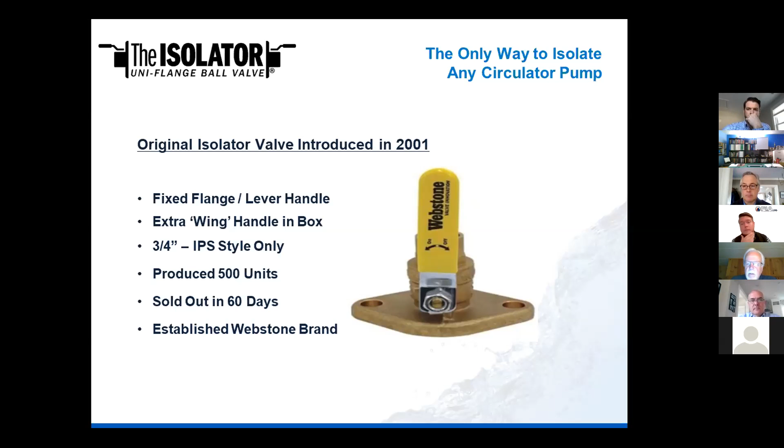So take a look at the offering now. Really the broadest offering of isolation valves in the industry. Rotating flange, isolators with drains, double flange checks, round flanges, flange styles, which we'll review. But from 1/2 inch to 2 inch and with 7 connection styles, we've really got the broadest offering in the industry. If you're wondering about the end connections, that's green and blue.

We partnered with Aquatherm about 8 years ago now and produced an end connection for the polypropylene piping. And we produced a generic version as well, which is the blue ends. And this was a challenge for our engineering group. We had to figure a way to mold a plastic resin end onto a full forged brass ball valve. And we did it for the isolator and a few others. Next slide, Chris.

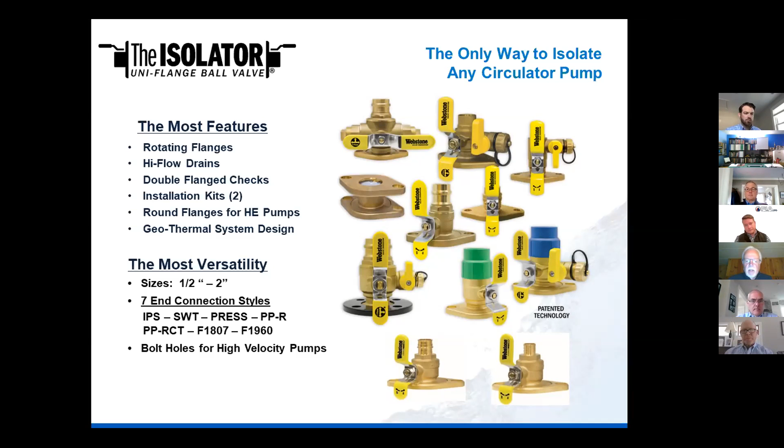Just did a little research on the market in New England as far as the press end connection goes. And this has been pretty steady for the last year or so. 45% of the isolators sold are press, and the combined IPS and sweat make up the balance of 55%. So we definitely have a press market. We've known that for some time. And it's indicative of some of the models we've come out with, which we'll review in a little bit. Next slide.

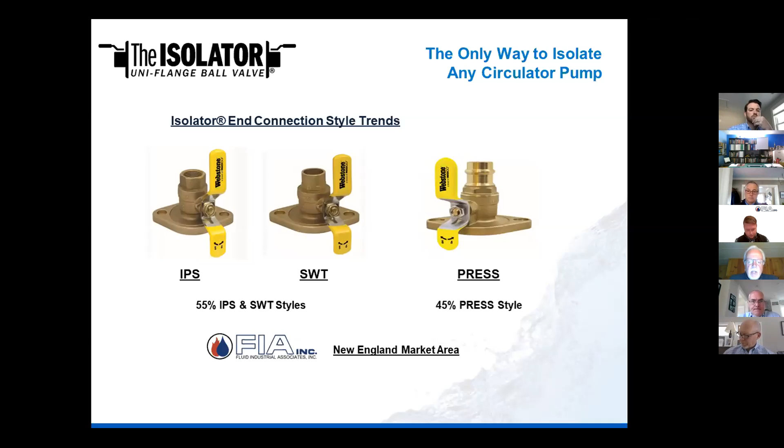Here's the story, and this is similar for a lot of the offerings from Webstone, where we've got time savings. The old way to do it is a time-consuming component assembly, and it has just made sense to a lot of the tradesmen in the Northeast and in New England to get the valve already produced. If you can take a look at where this purge valve is here on the fixed flange isolator. Next slide, Chris.

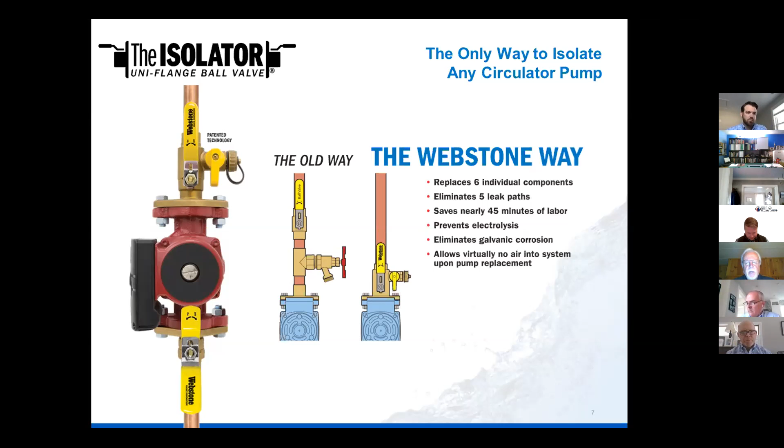When we came out with rotating flange, you'll see the purge drain here is right off of the main ball valve. And this created an opportunity to design a ball valve that could do something that nobody else in the industry has. So this is a unique product to Webstone. We call it the multifunction drain. And if you take a look at the illustrations, the one on the far left shows the application where the flow goes right through.

You turn the valve to the left, and you've isolated the top of the valve and allowed the flow from the bottom, always with an outlet to the purge. And if you turn the valve to the right, you've done just the opposite. You've isolated it from below, and your flow is from the top and always to the purge drain. So this is the only isolator in the industry where you can purge from both sides of the pump.

Some contractors feel this is a great advantage, having kind of a central purging location, but it can certainly be helpful if you need to purge from either side of the pump. Next slide.

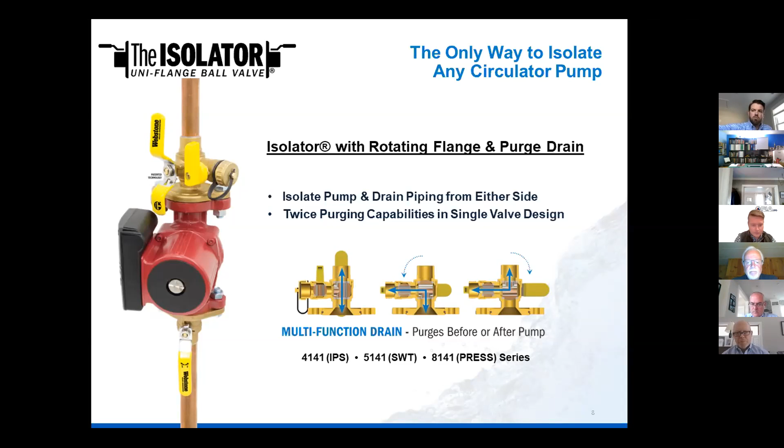This round flange isolator was an idea brought to Webstone by FIA some years ago. And there are 5 manufacturers of variable speed circulators that have round flanges. You see them there listed. And we came up with an idea to create a valve 1.5 inches and 2 inches in size, because most of these applications are larger pipe size, available in IPS, sweat, and press. And the next slide, Chris.

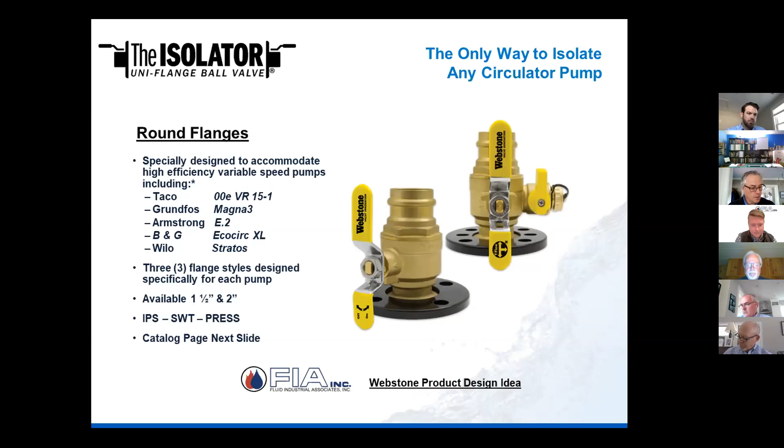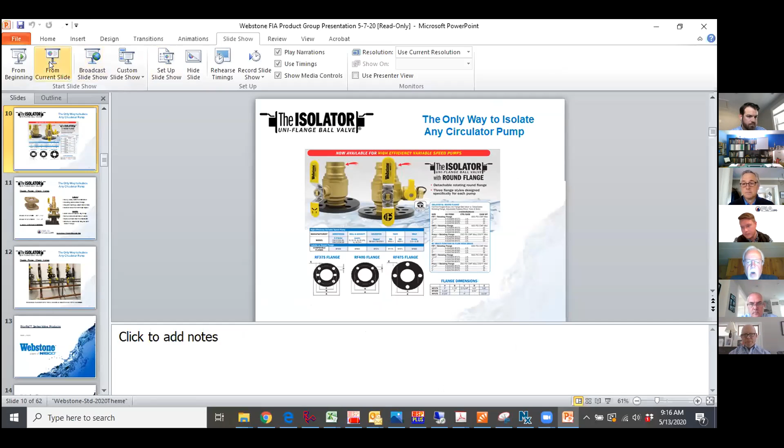Chris, if you could zoom in a little bit, I want to take a look at the left side of this catalog page. What Webstone did was we brought all 5 of these circulators to our Worcester office, and we took a look and wanted to make sure we got the flange right. And if you take a look at the flanges, there are 3 different circumferences, all have different bolt holes, and so we had to reference it.

And on this catalog page, I don't know if you can zoom in or not, Chris, but we've identified the type of flange that we designed, the RF375, 400, and 475. And we give what I think is a good reference look at how to select the right round flange isolator for your circulator model. So this is, again, unique to the industry. No other manufacturer has a round flange isolator.

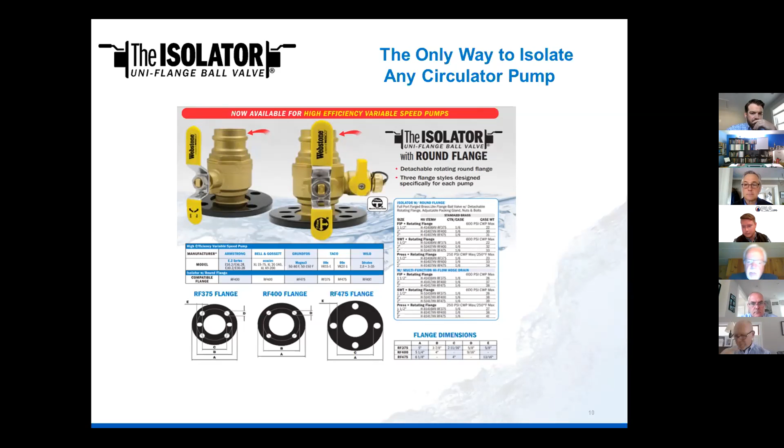And the value to the trade is this. Right now, they've got to buy a very expensive set of round flanges, and they've got to build their own valve. So here you see the isolator with and without purge drain. And it's a great value and should be packaged with those circulator models. Next slide.

Another idea we got from FIA was the double flange check. And this has been a unique product. Nobody else is offering this. Available in just 2 SKUs, 3/4 inch to 1.25 inches, and 1.5 to 2 inch. It's a heavy duty brass construction. It's got a rotating flange on the base and a fixed flange on the top.

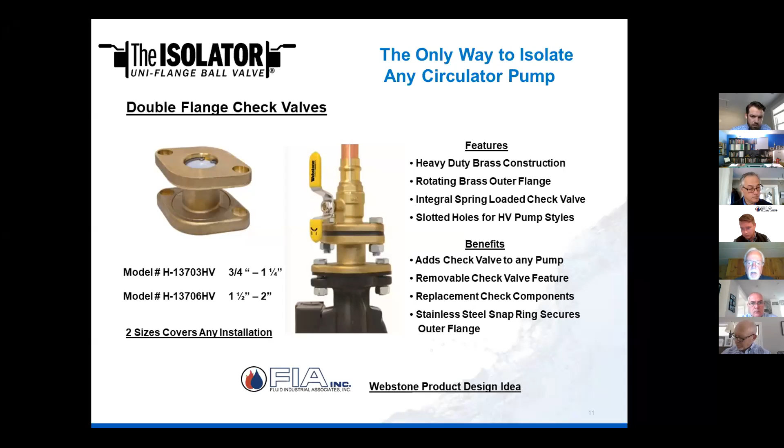The check valve is removable. It's a nice high flow product. I took some flow rates out of here, 15 to 50 gallons per minute for the smaller one, and 55 to 120 gallons per minute for the large one. So a very unique product. If you go to the next slide, Chris, we'll show an application of this.

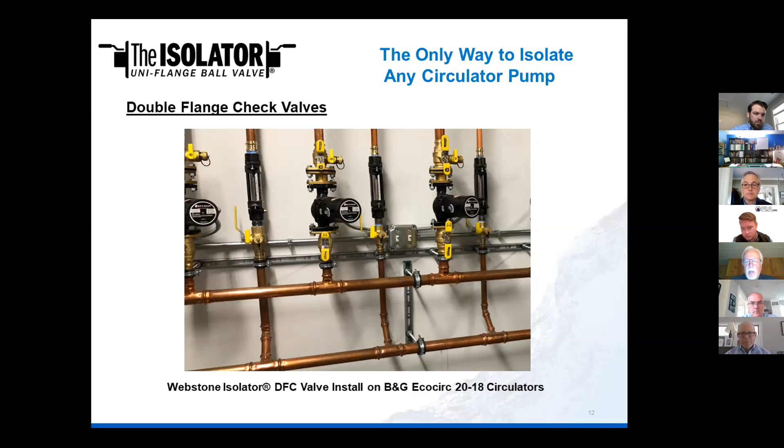These are new B&G circulators, evidently, and you see the application of the double flange check underneath the isolator with the purge drain. I don't know if you can zoom in on this, Chris, but you can get a good look at the install. You've got an isolator at the base of the circulator without a purge, and one on the top. And so that's a typical use of the double flange check. And it's been a good seller for us here in New England. Next slide, please.

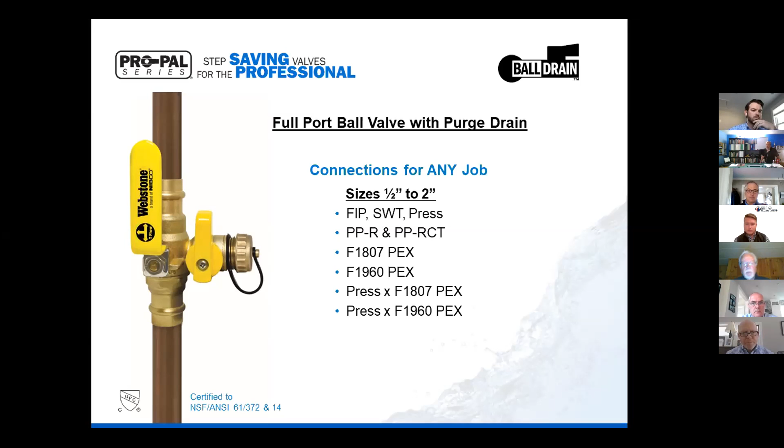Go right to ProPal. Next slide. Oops. This is the most popular valve in the ProPal series, the ball drain. If you click the next button, Chris, we'll get some copy up there. Multiple connections. This is sold and packaged a lot with the isolator. And if you take a look at the insignia on the handle, there's a T-flow feature here. And if we go to the next slide, we'll show how this particular product is quite valuable to the trade. Next slide.

Here's a diagram of old way versus the Webstone way. Time savings for sure. If you take a look at the illustration, we're trying to point out that if you build this particular valve, you're going to have a drain on the top of the valve or the bottom of the valve. So you're going to be limiting yourself to where you can purge from. And if you take a look at the far right, this particular valve has the ability to purge from either above the valve or below the valve. And you do this by taking the handle off the stem, turning the stem, and reinstalling the handle so you get the flow from either side of the ball.

I can't tell you how many contractors at trade shows have come up to me and said, man, you really saved my ass. I thought I wanted to isolate from one side. And what we have on this valve is a little sticker which explains how to do the handle swap, and the contractors evidently read that, but it's another little feature of how to make this valve a lot more valuable. Next slide.

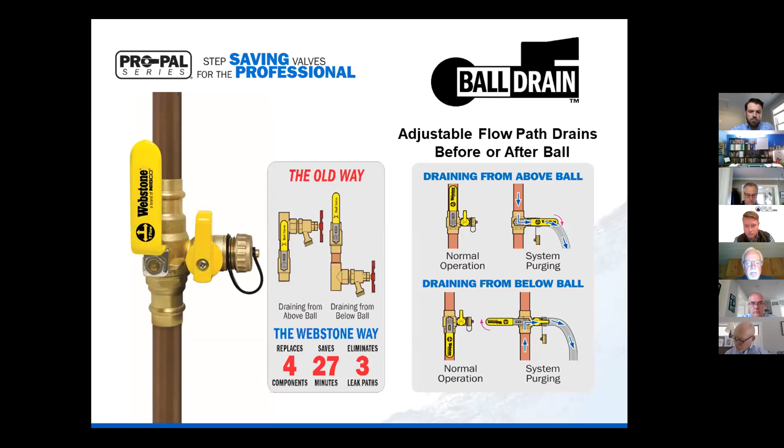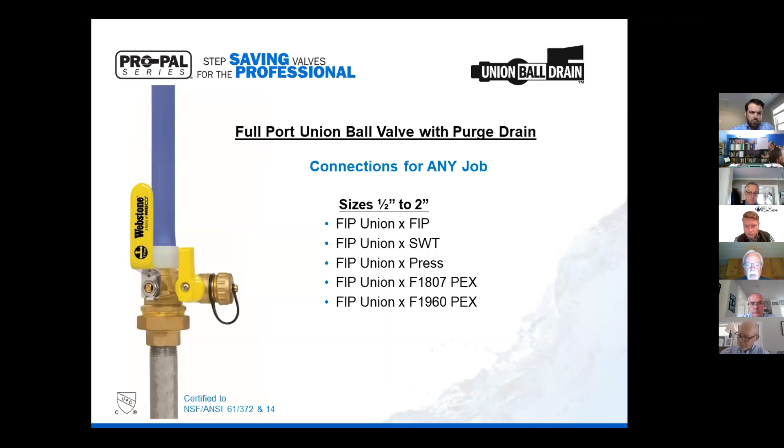We also offer the same style in a union connection. This has got a different application where you can put the union on some equipment. Go to the next slide, Chris. We're showing it here on a water meter, which is a sensible place to put it. So the union connection brings another element into it, more components needed to build it. And between the union, the ball valve, and the purge, you have the same ability with a T-flow handle to swap the handle out and get the flow coming from either side of the ball. Next slide.

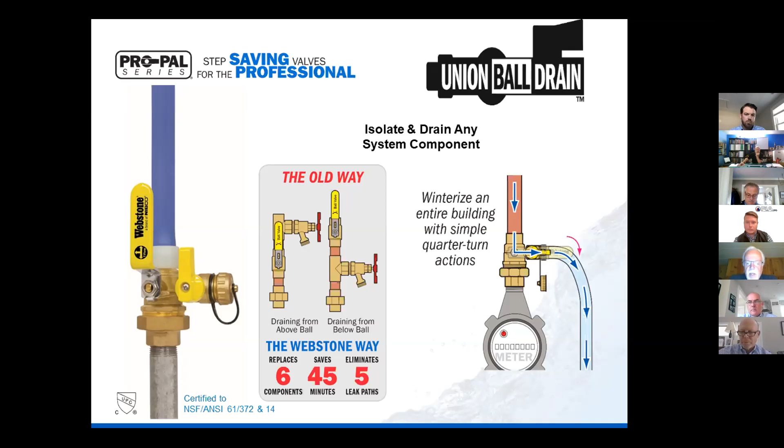This particular product idea came from our rep in upstate New York. And if there's anybody visiting us from New York State, you might know Steve Z. What this valve is, it's an expansion tank service valve. And it's primarily used to make the change out of the expansion tank easier. You can isolate it from the system and then purge out the valve, not to make a big mess, but put a hose on there and bring it to a drain and make it a little easier.

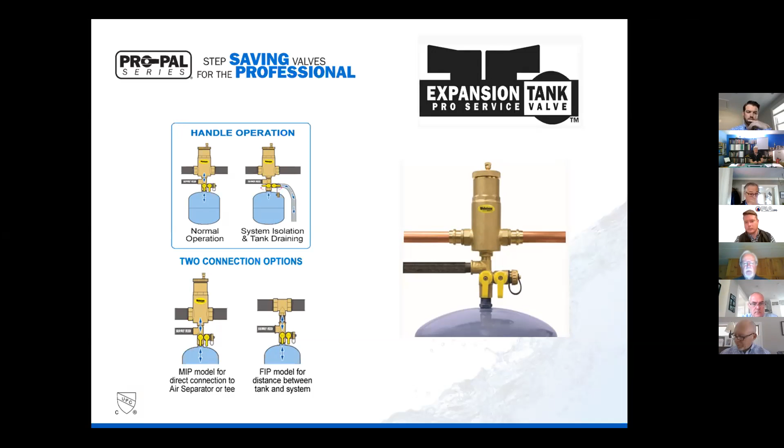So we came up with a female model that'll allow the contractors to put a spacer in there to allow a little more room in between the supply feed and the system run. So this has been a very successful product for Webstone. Next slide.

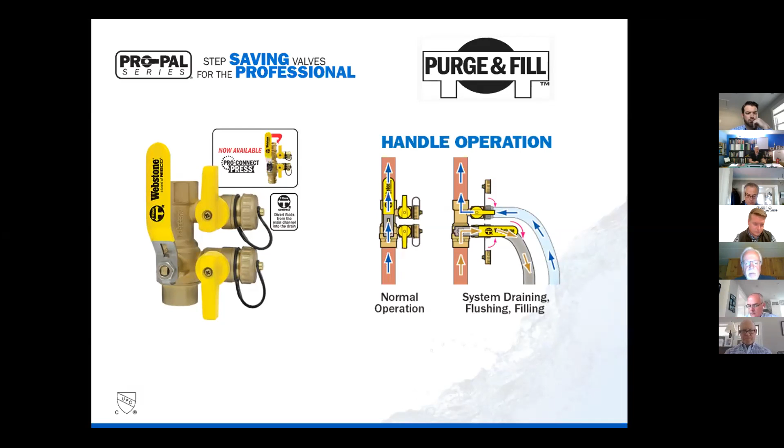Another unique product to the industry is the purge and fill. This is used in snow melt systems, anywhere you need some system draining, flushing, or filling. You take a look at this, it looks like two ball drains together, but the illustration says it all. You can isolate one side of the valve, purge in your glycol or whatever you're utilizing, and have it go through the system and then drain right out. So you can system drain, flush, and fill very, very easily. Next slide.

This is going to be an interesting segment. Our press and press by PEX transition valves and fittings have really expanded. And next slide. We're going to show a little bit about our press end ball valves. We have two styles really: from 1/2 inch to 2 inch is universal press tools. And for 2.5, 3, and 4 inch, we went to an XLC press end. All have adjustable packing glands.

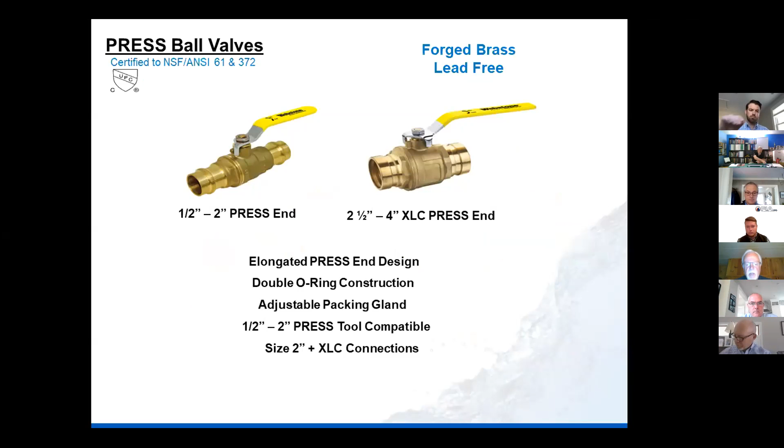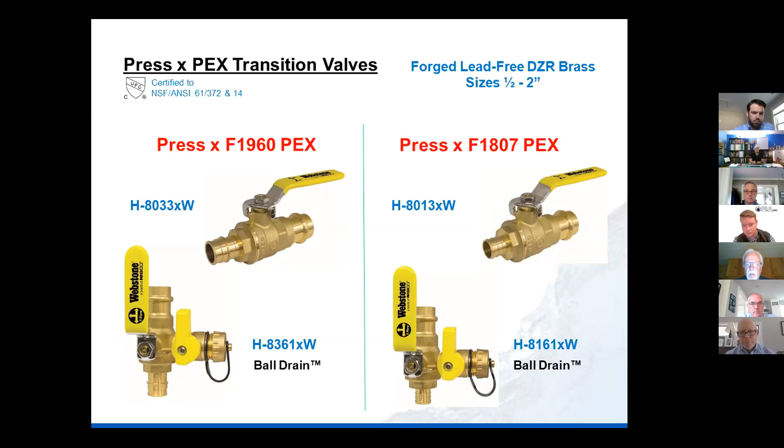For the first time, Webstone introduced some press by PEX transition fittings. First time we've ever had fittings in the product line, but considering the application and the Webstone way, I believe if a contractor is going to look for a way to easily transition from press to PEX, they look to these fittings as really their option. And we've introduced some reducing sizes. The sizes go from 1/2 inch to 2 inch, and the reducing sizes now are available from 3/4 by 1/2 and 1 by 3/4. So these have been a really good introduction to the Webstone line. Go to the next slide, take a look at how we expanded it.

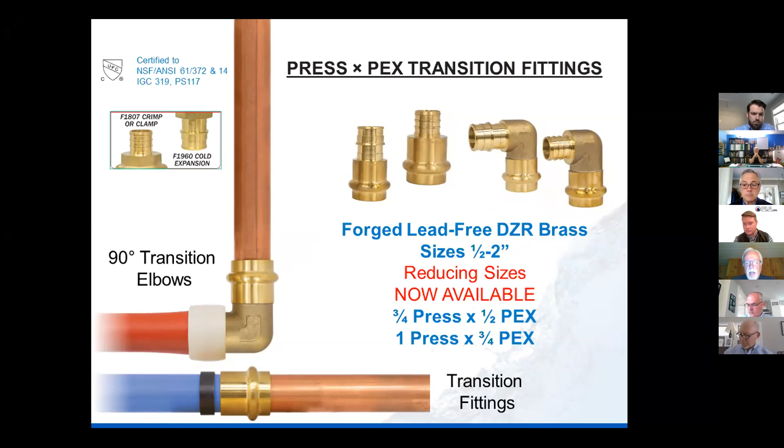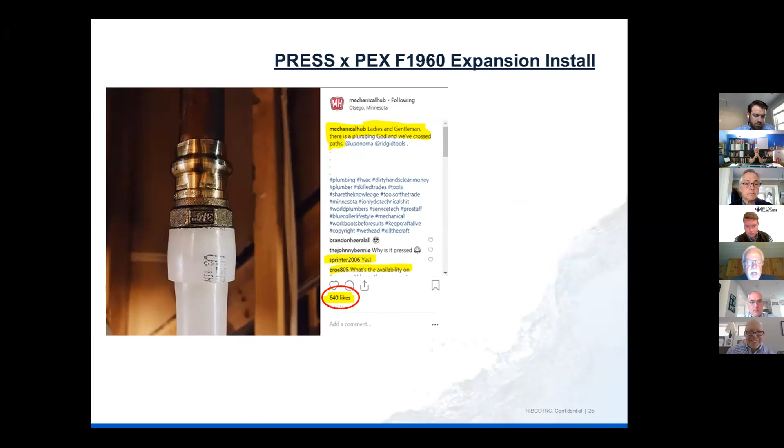Well, first, this is kind of a shout out from Mechanical Hub. They pay a lot of attention to product lines like Webstone, and here's a posting they had, and if you read what's highlighted in yellow, it says, "Ladies and gentlemen, there is a plumbing god and we've crossed paths." So a lot of passion and interest with a lot of likes from this illustration. If you click the next slide, Chris, you'll see this is the coupling installed with PEX. This is expansion, and this has been a great addition to our line. Next slide.

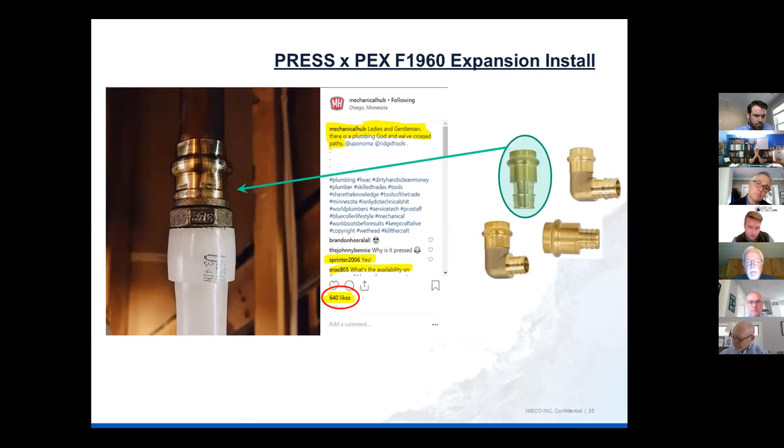So at the AHR show in early February, I saw these for the first time, and with a lot of contractors and distributors from the Northeast that were installing and utilizing radiators, this was received exceptionally well. I didn't realize at the time that the copper used in radiant and baseboard was soft. So soft that the contractors would acknowledge that it's really risky to put a press gun on that soft copper because it could easily damage it.

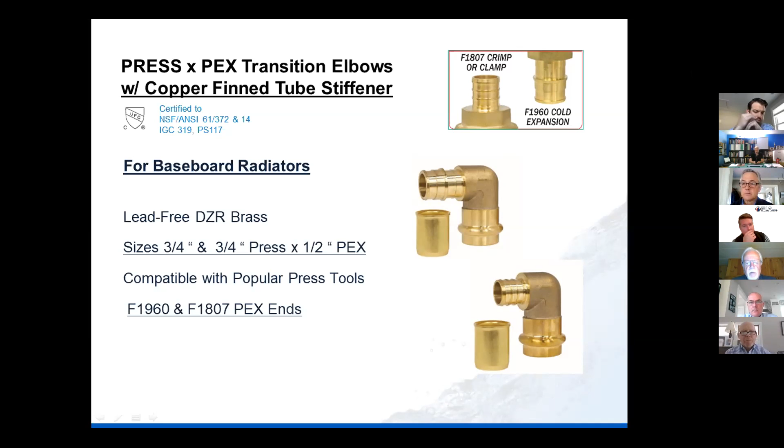So we packaged this product with a stiffener, and it inserts itself into the baseboard copper, and then you can confidently press on the copper piece with the stiffener installed there. So these are going to sell very well in New England. You go to the next slide.

About 2 weeks before this AHR show, a contractor in upstate New York said, "Boy, if you could just put a vent on one of these elbows, you'd really have something there." So as we got to the event, we had these baseboard displays, and we don't only have one vent outlet, but two. And if you want to go vertical or horizontal, we package one plug along with a stiffener, and the value on these elbows is really exceptional.

It's not that much more money than a regular press by PEX elbow fitting, and we're getting extreme interest in these products. Just recently introduced. We just formally announced it in May, and we got a nice thumbs up from Mechanical Hub as best innovation for the AHR show. So hopefully we'll see some activity here. Next slide.

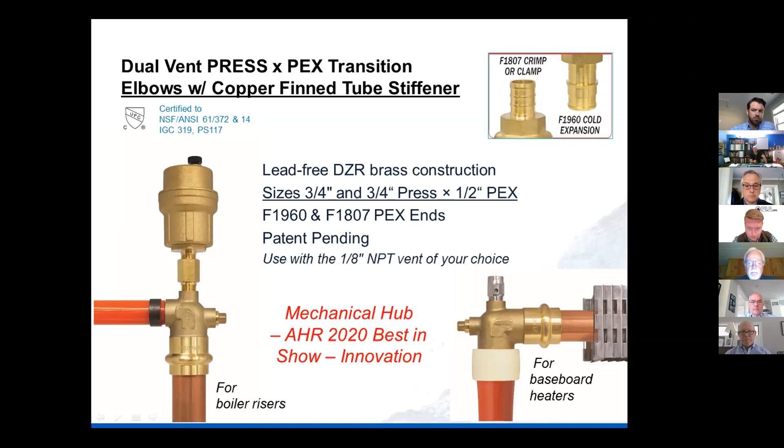This next category is Hydro-Core manifold kits, and we're going to take a look at some installations on the complete kits for the Lochinvar Noble boiler.

First, a look at this. I became product manager for this Hydro-Core group about 10 years ago, and I remember Andrew Pratt and I assembling some contractor committees as we were making final decisions on not only complete kits, but this Hydro-Core manifold in general. Our engineer at the time, Jason Olson, had a lot to do with this design.

Accurate spacing on closely spaced tees. And if you can see the two valves, there's a version of our isolator and a version of our ball drain. This makes up the manifold kit with two valves on it.

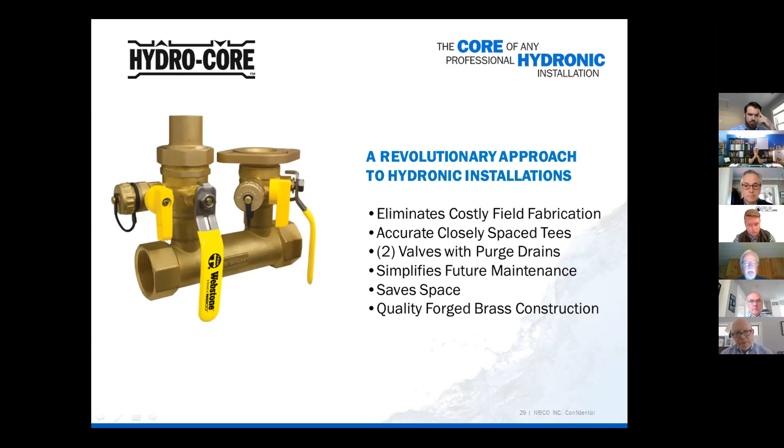You're going to see some different style kits, but it also comes with a manifold, and there's that T-flow ball valve design. We'll go more into detail and show the application and the value there. Next slide, Chris.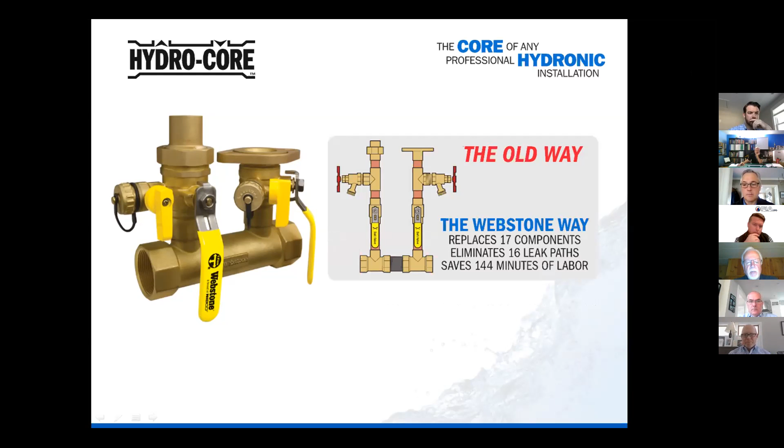Here's the savings. If you were to build this, you'd spend a lot of time and effort, with a lot of components and a lot of potential leak paths. This is all one unibody construction, this Hydrocore manifold. Next slide.

These are the versions that the manifold kits come in. Sometimes you need the flange on the right side, sometimes on the left. There's a lot of boilers in the market where the circulator is inside the boiler, so there's no need for an exterior flange. So we came up with what we call a double ball drain manifold, in different size connections.

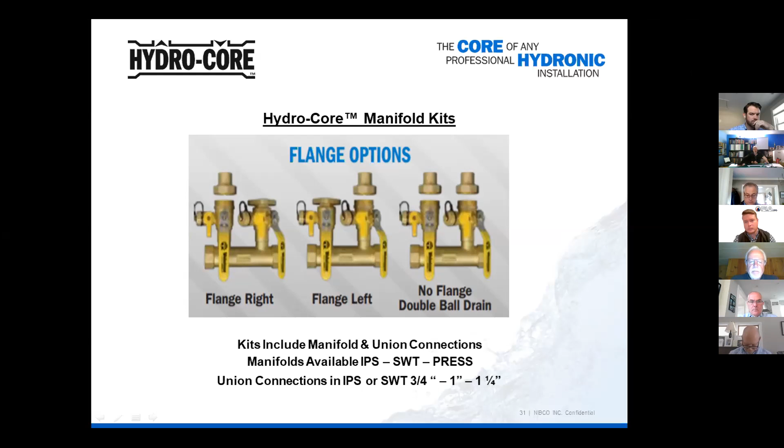Go to the next slide. If you can zoom in, Chris - I created this catalog page just to show how easy it is to reference what manifold kit to select. If you can't zoom in, that's okay. Yes, can't zoom in, but okay.

These are just the different types of applications coming off the boiler, whether it's top mount or wall hung, and you'll see how we try to illustrate it. You can pick these up in our catalog or on our website, where we show the different styles of manifolds, and try to give you a system run size and a boiler connection size so you can pick the right manifold for the project.

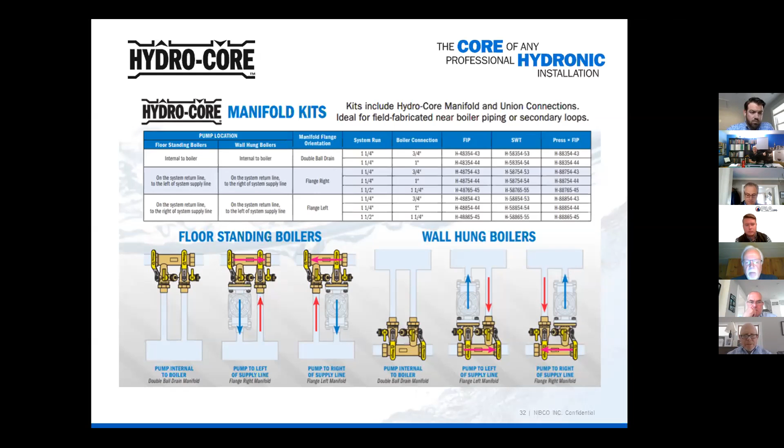Next slide. Various places to use the Hydrocore manifold. The most common is near boiler piping, but also on secondary loops as well. You're going to need closely spaced tees and perhaps a circulator application there. So these can be used both near boiler and on secondary hydronic loops.

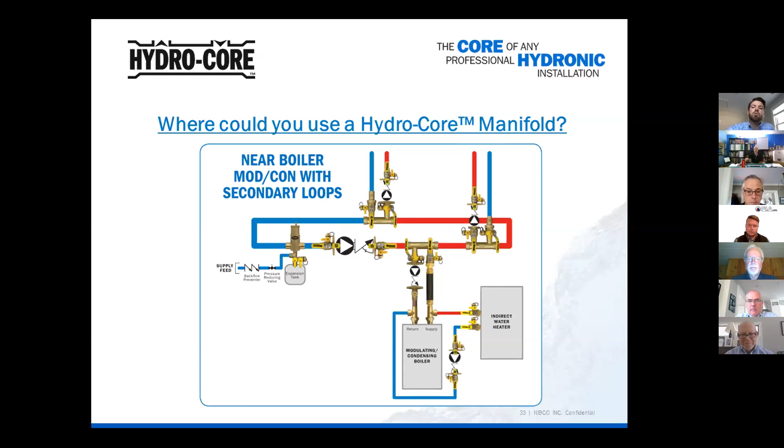Next slide, Chris. A close-up look of the manifold.

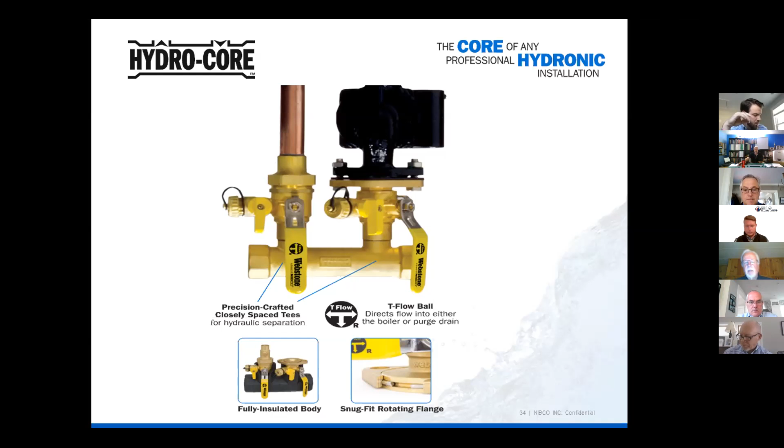Not having a zoom - if you look down at the bottom part of it, we put a little jacket around the manifold, more for packaging purposes, but it turned out to be a good jacket to put on after the installation. This connects to the manifold on both sides, with a couple of ties there. So once the install is done, you've got a nice little insulation jacket to put around the manifold. Next slide.

This is a really important slide to point out all the benefits of the Hydrocore manifold near boiler. The top left shows the normal operation of how the flow would go right by the manifold unless the system needed it. With the pump coming on, it would be sent to the boiler and then back out.

It simplifies isolation. If you have to isolate the circulator for any reason to remove it, you can do that. Down below, there's a way to purge the system. This may not be everybody's choice, but because of the specialty ball valve design, you can isolate the boiler from the system on one end, allow the fluid to come into the boiler, and instead of purging back out into the system, it purges the system out. Another way to do this is to put a valve before the Hydrocore manifold, but you can see how you can isolate the system.

To the far right is a story that really tells it all as to the value. All manufacturers like to see an easy way to purge and clean their boilers. So by introducing a source of cleaning fluids into one side of the manifold, the pump takes over, introduces the cleaning fluids into the boiler, and then discharges before it hits the system again. You've cleaned your boiler out just like you would purge and clean a tankless water heater.

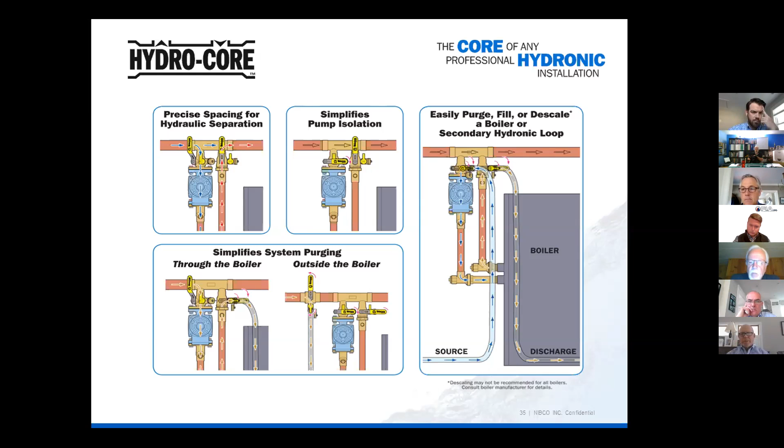This is a look at the time savings. This kit is actually the original complete kit for the KBN Lochinvar boiler. And this was a side outlet supply return.

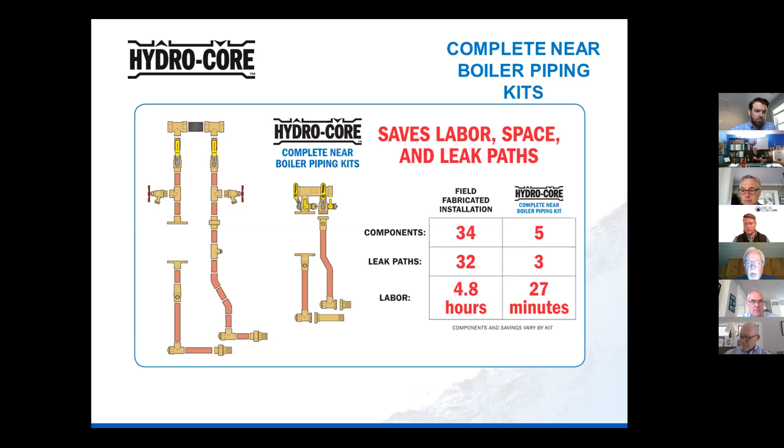But take a look at the components that you'd have to build on the far left. A lot of times you can get from the supply return with this kit in a matter of minutes instead of hours. And this is really what kicked off our complete Hydrocore kits for the Lochinvar series. And we came out with this kit specifically for the KBN boiler. Next slide.

If you go to the next slide, Chris.

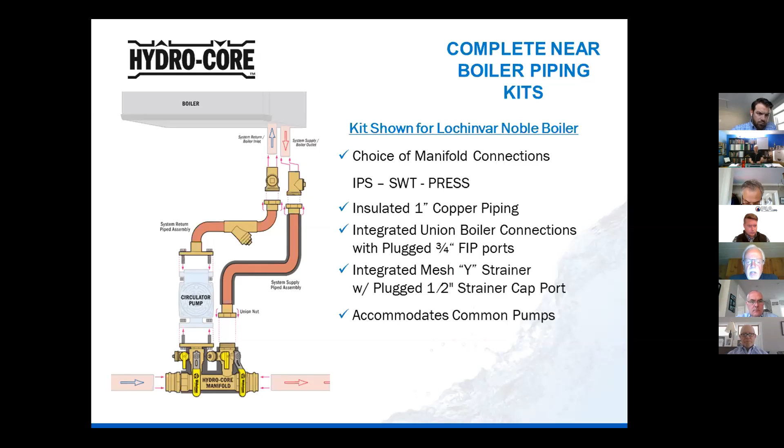So I went back to our Worcester facility, and the very next day came back, and what I grabbed was 2 bent copper pieces that were utilized for the old WHN Lochinvar boiler. Son of a gun, we laid the combi boiler on a table. We connected the supply return to the left and the right, and we found that this bent pipe that came down close to the manifold created the perfect near boiler piping kit for 2 reasons.

It allowed it to drape down perfectly to the manifold, and if you've ever installed one of these, you can actually swing this a little bit. So the manifold can swing back or forwards and get out of the way just a few inches, to get out of the way of the piping and size up where you want to start your run. The other thing it did was it gave space for the domestic hot water heater service valves.

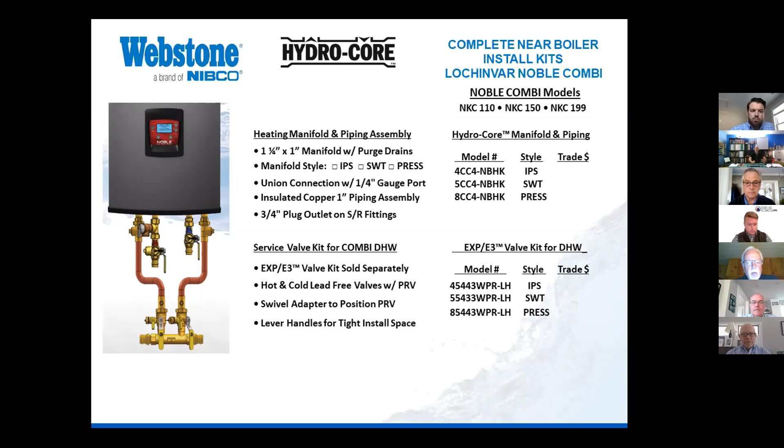So this page was meant to point out a little bit of the feature and benefits, really for a wholesale distributor that wanted to prepare a contractor's price, look at some features of the size of the manifold, availability in IPS, sweat, and press, the details about the copper assemblies and the 3/4 inch plugged outlets, and then some little details about the Webstone EXP E3 kit, sold separately, but together the package makes up a very valuable and good install kit for this Noble Combi boiler. Been available for about 3 years now, but good kit. Next page.

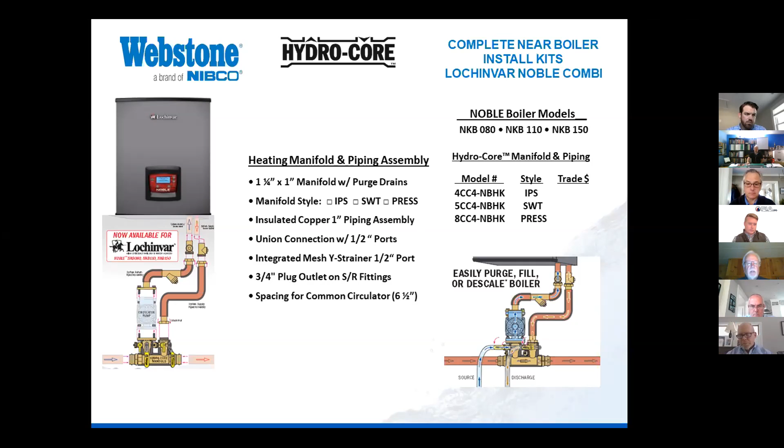Here we've already reviewed the heat-only Noble boiler, but here's another example of a sell sheet that a distributor could use. The manifold sizes are outlined, and the piping configurations are there. In the bottom right, I put an illustration about how you can purge out the boiler with the Hydro-Core manifold and the specialty valves we've got on it. So two good Hydro-Core kits for the Lochinvar Noble boiler series.

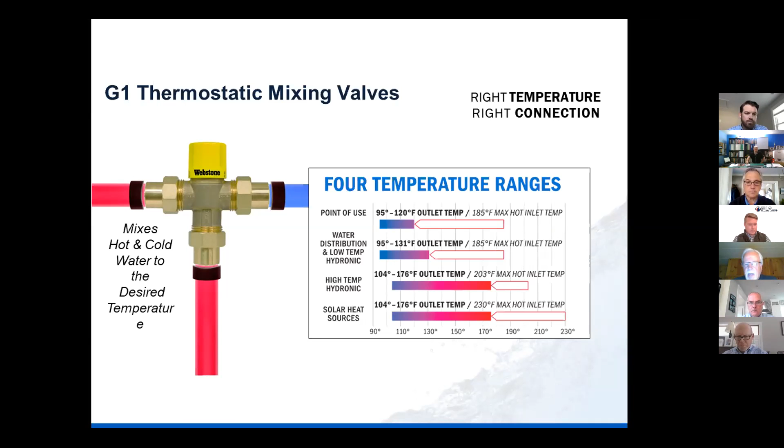I don't know how strong solar is in New England, but the features here are that we needed a high temperature input for solar. So 230 degrees max is what we've got there.

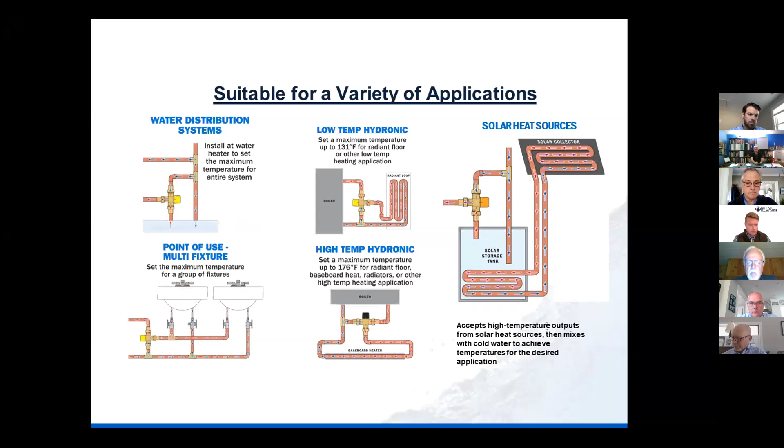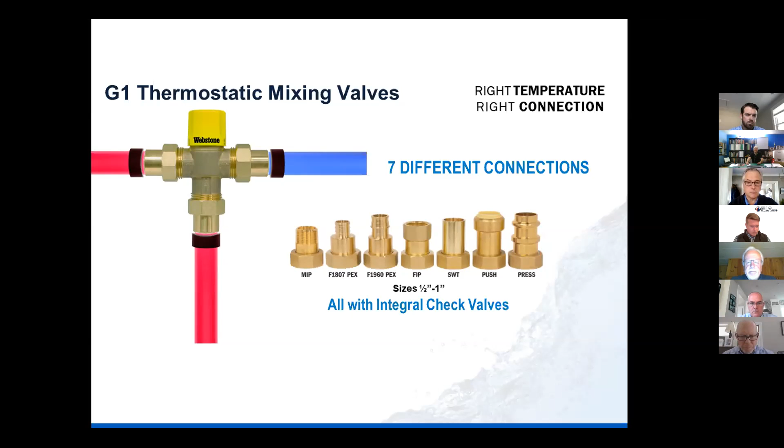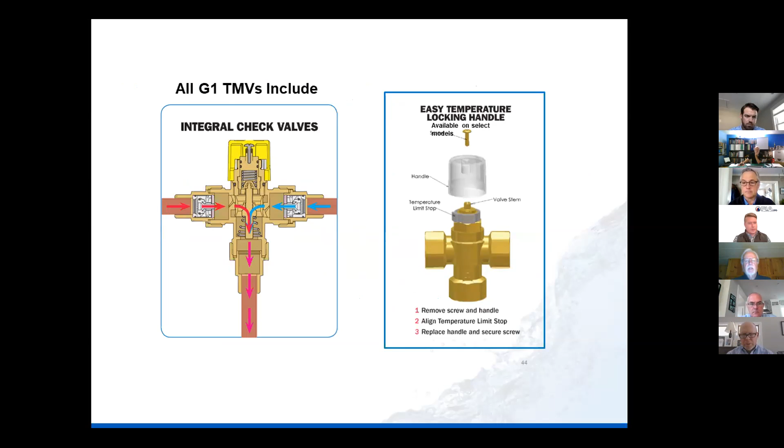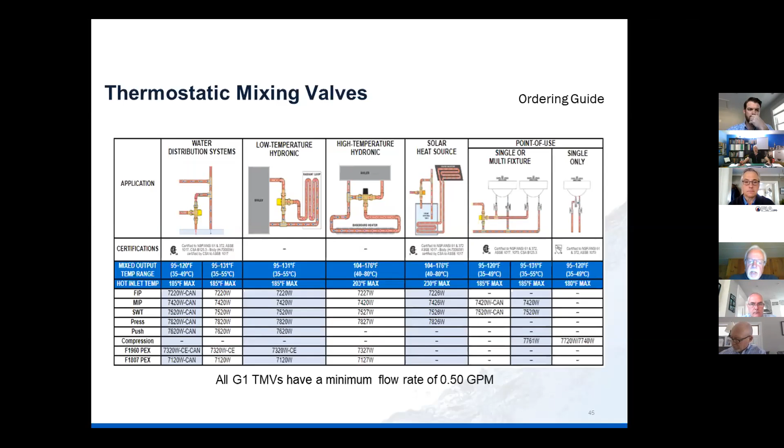We came out with a water heater tempering valve about 2 or 3 years ago. There are some states that have this as a code, state of Vermont being one. I just started to manage the Ohio market area, and that's a code out there. It allows the water heater to be set at least 140 degrees, minimizing risk of developing Legionella bacteria, and prevents risks of scalding, which is the main feature.

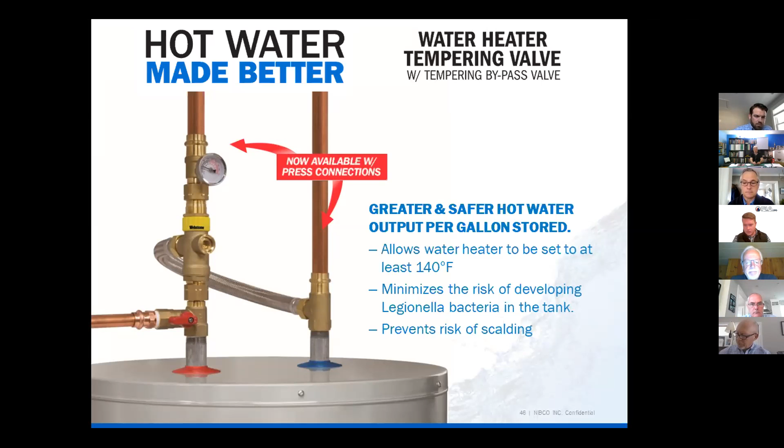It's often referred to as a booster, to try to make a 40-gallon tank water heater a little more efficient and a little stronger. Here you take a look at our features: adjustable temperature control, an integrated recirculating port, and a new feature recently is a new tempering bypass valve, if you've got to go to some equipment like a dishwasher, commercially or residentially.

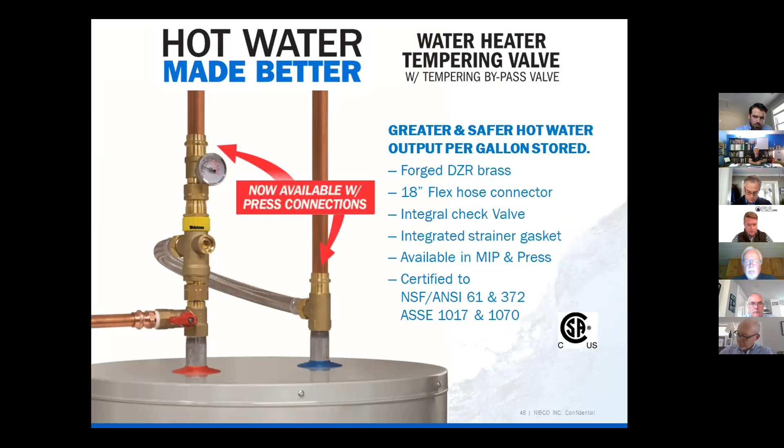Here you see the application of what might happen and what temperatures might be needed. The mix here is 86 to 120 degrees, and if you bypass it, you can get up to 194 degrees. Good product and good addition to our thermostatic mixing valves.

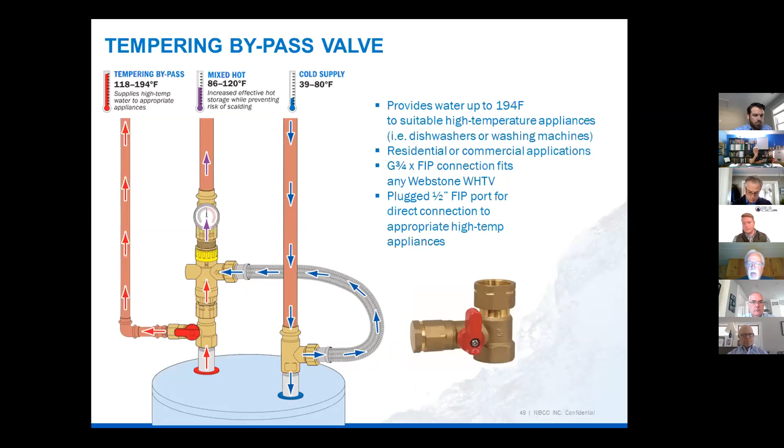This is the best selling new launch product for Webstone nationally. It's an under-the-sink thermostatic mixing valve, small, comes in 3 styles, with a quarter gallon per minute flow rate.

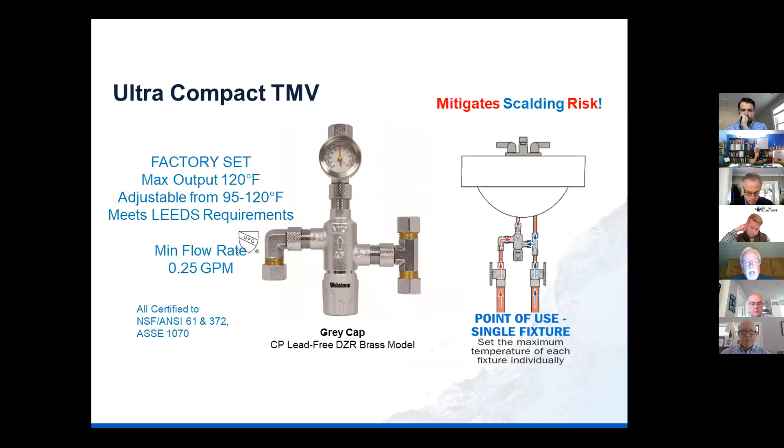It comes in three ways. On the far left is the most competitively priced product where we're winning a lot of projects. Steve Graham just introduced this to an engineer working on a high school in the Worcester area. I had the same project quote out in Ohio for a high school where they're putting these under individual sinks, and you've got a mounting bracket that comes with this.

A lot of projects are considering the bypass valves, so it comes as a body only valve with the bypass, or the valve with the bypass and the gauge. So a good addition to our line—we think we've got good competitive pricing on this for projects. So consider this if you're working on a project that needs an individual thermostatic mixing valve for an under-the-sink application.

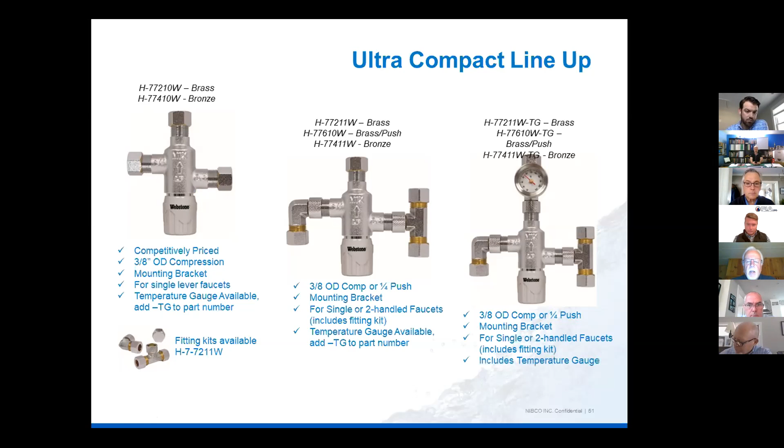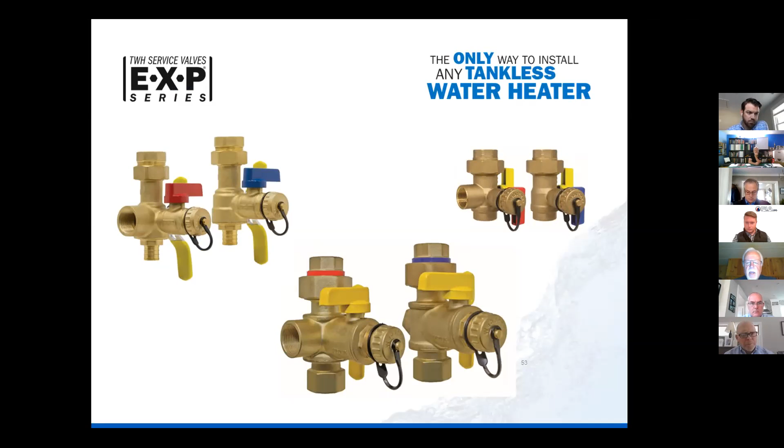Next slide. EXP service valve kits. We'll go to the next slide and we'll take a look at the Webstone offering here. We were one of the first to come out with these service valve kits, back in the early 2000s. And this has been really a high profile kit for Webstone. The valve kit on the bottom is our original EXP kit. The one to the left is where we're selling most right now. And the new version to the top right, we'll talk about in a few seconds.

If there was any example of why buy a Webstone product, it's the ability to have a complete product. And the old way is very cumbersome to create a valve kit like this with unique connections, purge drains in the valve body. These have to be compact to fit underneath the tankless heater. And I think there's a viable way to take a look at these kits as being very valuable for that application. We also make this in a 1-inch style with a 30 PSI pressure relief valve. And sometimes these are used on boilers as well. Next slide.

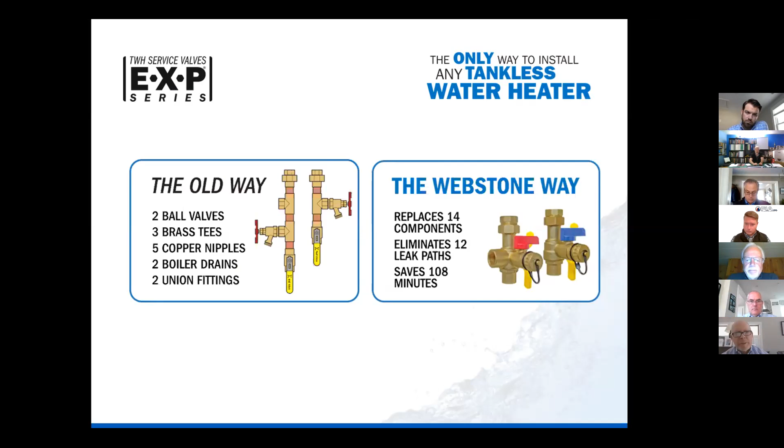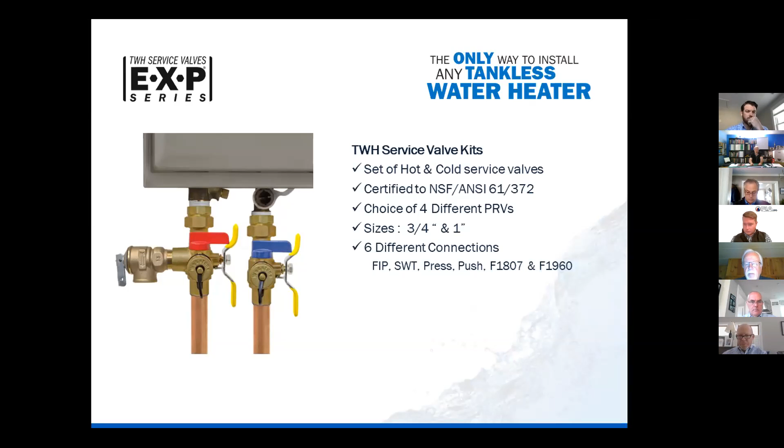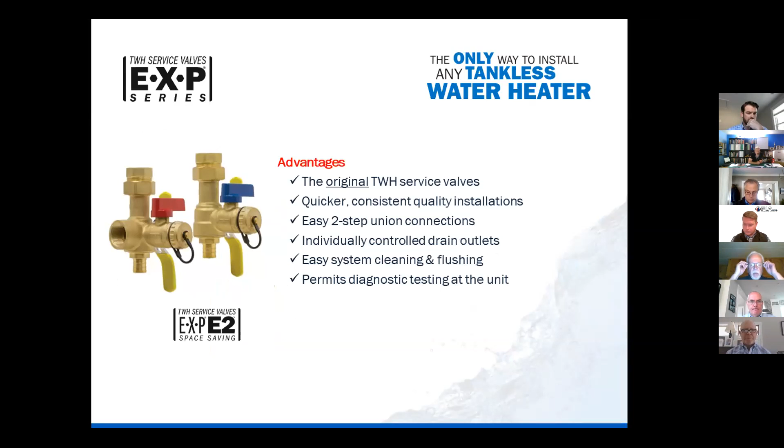Here's the application setting, which is typical. We make these in 3/4 inch and 1 inch. 6 different configurations from FIP, which is the most popular, also available in push and press end connections. Next slide. Here's the original, and this particular illustration shows it in the PEX end connections, used for diagnostic testing on tankless, but primarily for the cleaning out of the tankless water heater. Next slide.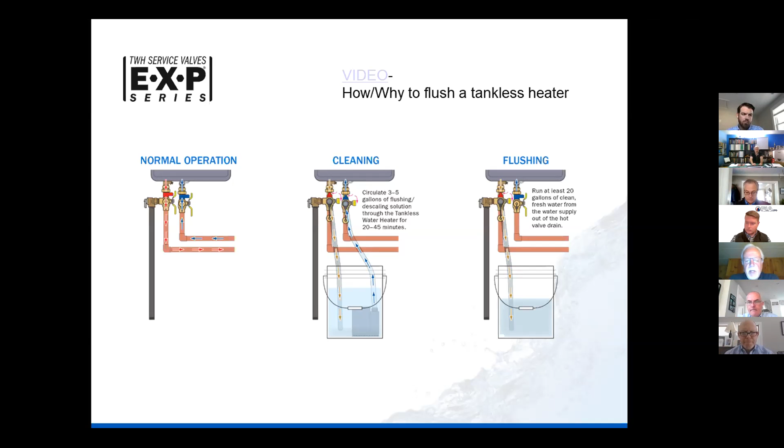The industry is changing. We put in these 3 examples where tankless water heater manufacturers are adding features to their equipment, which is going to change the need for the service valve kits from Webstone as we know it. You take a look at the one on the left, Rinnai has put a PRV port on their certain model series there. Noritz in the middle is putting their connections on some products on the top. And in the far right, you take a look at the Bosch Greentherm tankless heater, where they're even putting flush valves on their equipment.

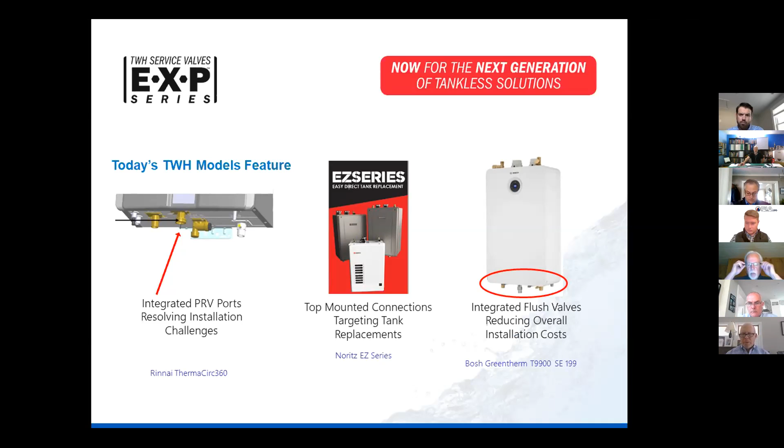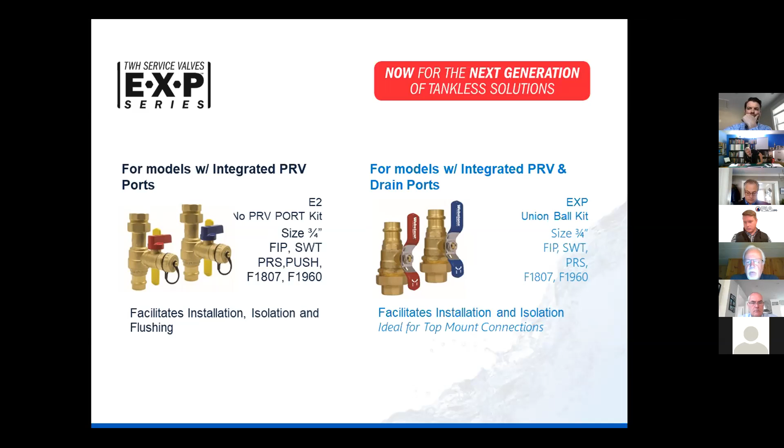So you go to the next slide, you'll take a look at what we've done. We've created some different features on our product. On the far left, you take a look at a hot and cold valve, but you see we've taken off the pressure relief valve outlet. Not necessary for those tankless water heaters that have that already on their equipment. And you take a look at the one on the right for those tankless water heaters that are going to put the purge drain on there. We assume they're still going to want to isolate their equipment. So you got a hot and a cold valve with a union connection available in a number of end connections. But this might change in the future the nature and the style of the service valve kits for tankless water heaters. Next slide.

So we've come out with a more competitive valve kit. We call it the EXP Ultra Compact. This industry segment's getting very, very competitive, and we needed to address price points. And so the EXP Ultra Compact really gets us into a competitive price point range. We made it just 30% smaller than the current EXP E2, and that was enough to give us the price point that we needed. Next slide.

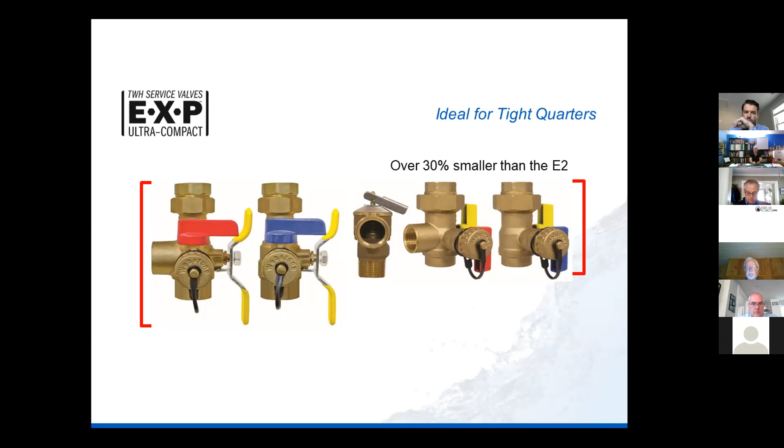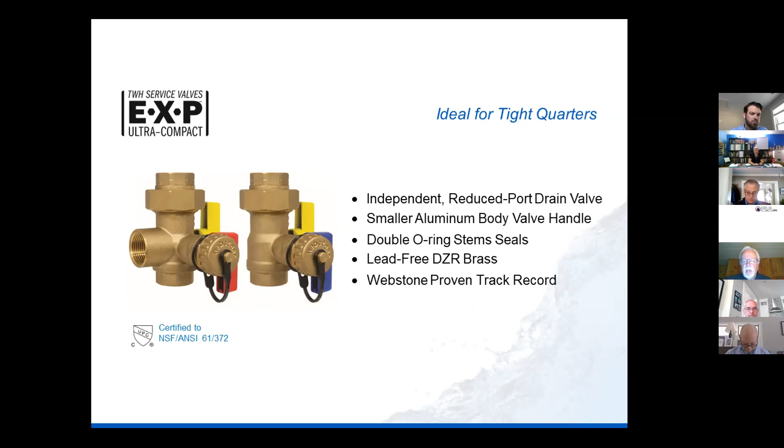If you hit the button a couple times, some copy will come up. But in introducing this, we've just explained that it's an aluminum body valve handle. It's got double O-rings for stem seals, but it's got the Webstone proven track record, our warranty, and this is available now. And so if you're bidding any projects and want to take a look at the EXP Ultra Compact, this really rounds out the EXP series for Webstone and gives us a good range of valve kits to offer. Next slide. Those are the two styles. It only comes in IPS and sweat.

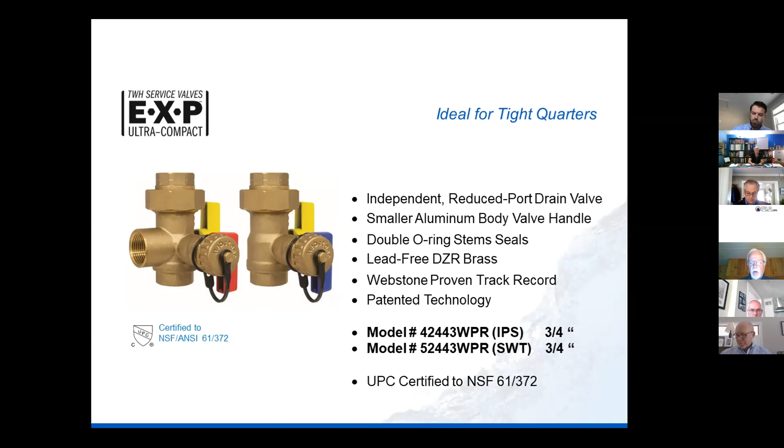And that concludes the presentation for Webstone and the FIA webinar. And I think we did that in a timely fashion where we can field a few questions.